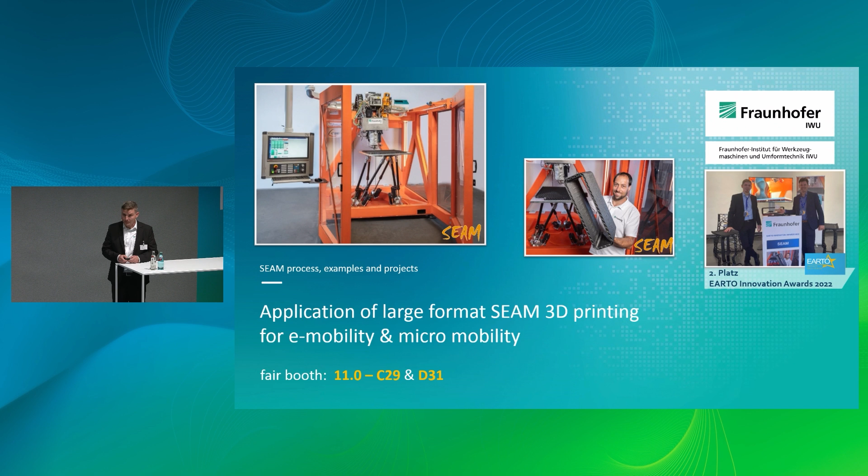First of all, the question is, what do we do? We are experts in, let's say, substitution. Our core business is to substitute conventional processes and materials with our innovative processes and materials.

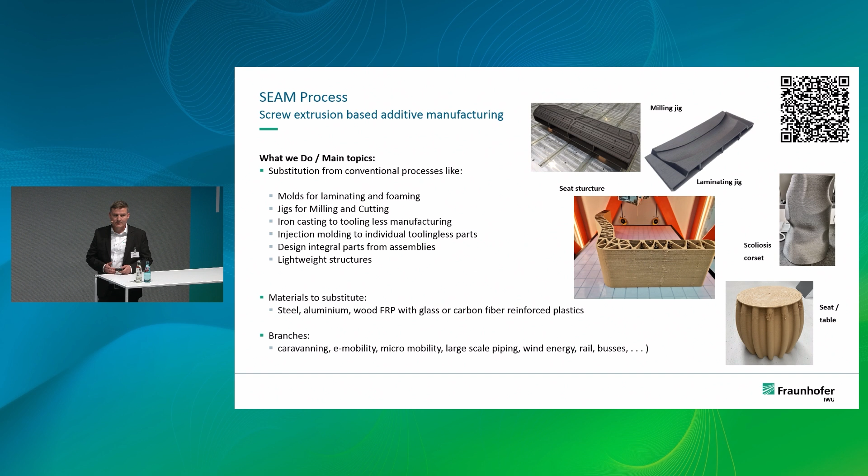After knowing what we do, the question is how we do it. We have different engines in our research department. We apply our SEAM extrusion head with different linear kinematics and also with robot arms, which makes it possible to have very big velocities for printing, and gives the advantage of getting very different geometries like organic or bionic shapes, or lightweight structures.

A fourth engine is in process at the moment. It will be a big 3-axis engine with a building room of 2 meters by 1.5 meters by 0.7 meters high, to get really big structures.

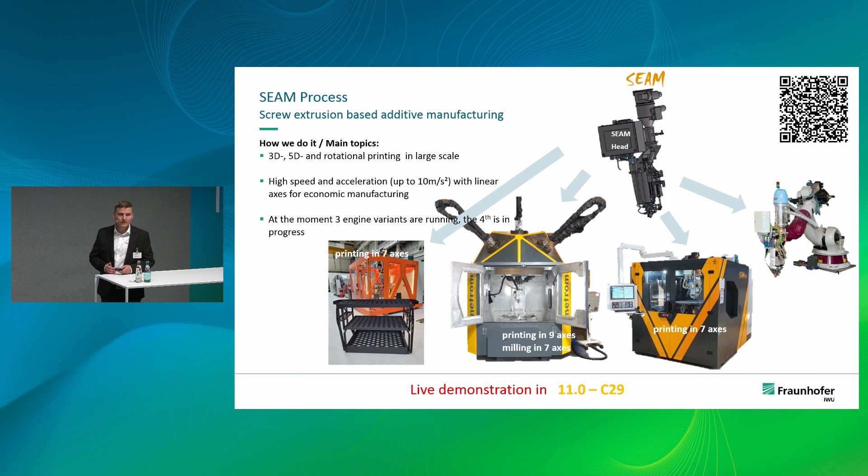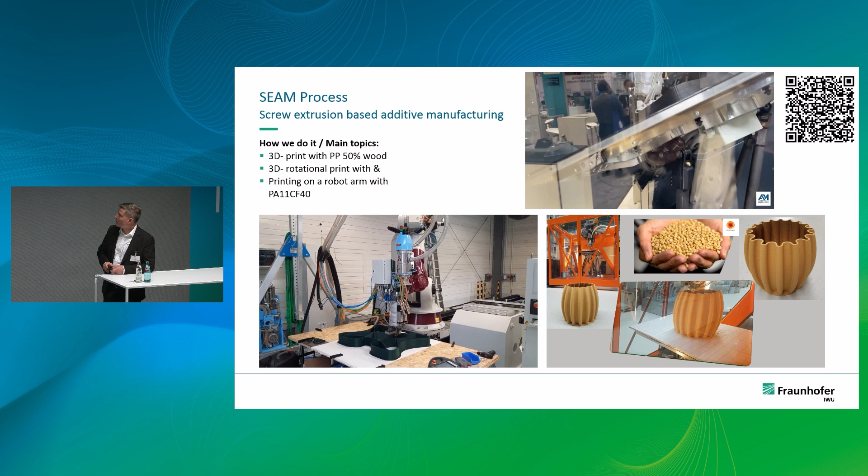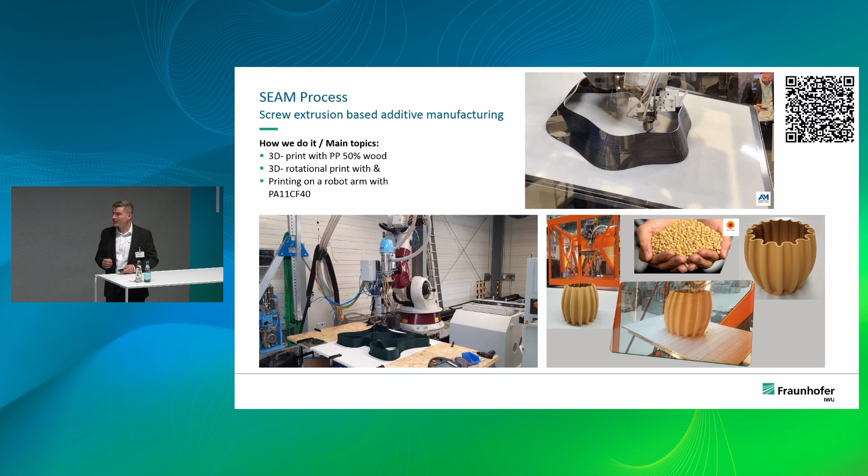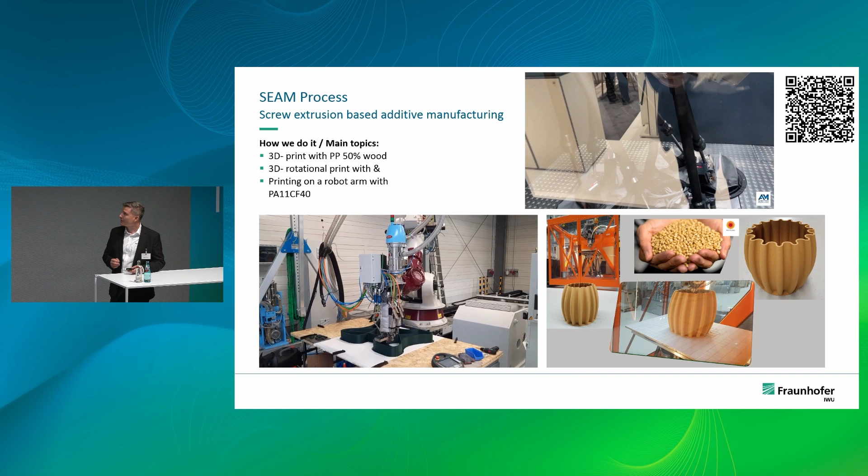On the lower left side, you can see the SEAM head on a robot arm. What's special about that is you can see the different velocities and the stopping in between, while still maintaining the same mass flow at all times. That's a special patent of our department—to have the same line width at all times while printing.

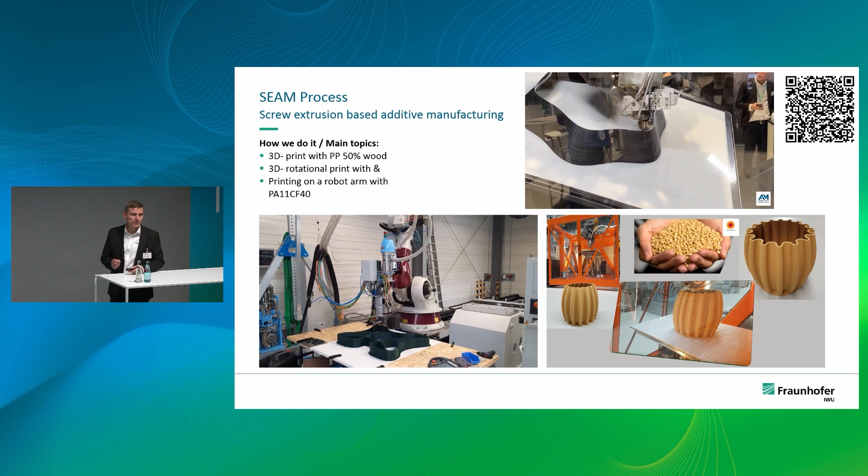What we also had is another approach for printing—a kind of rotational printing. On the left-hand side, you can see a part which is made to stand against high pressure, in this case 10 bar, and there was no failure in 5,000 cycles. We can apply a special ply book, for example, so you have different shells with different line orientations, and in the end the result is a really strong part.

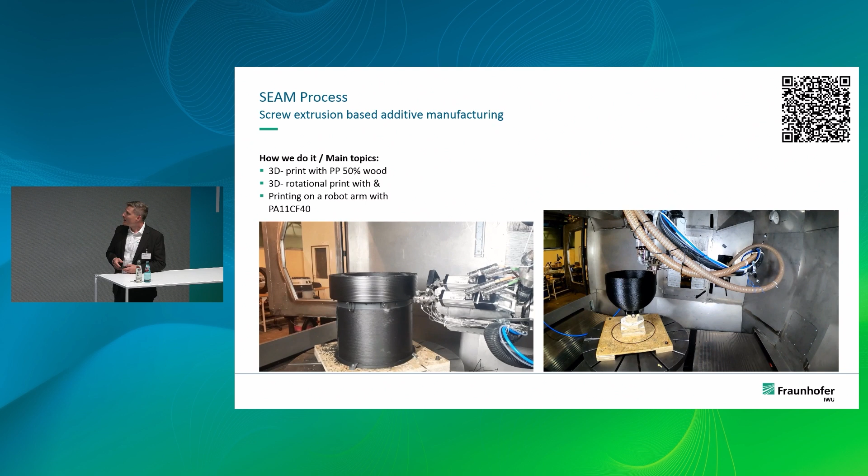On the right-hand side, you can see the inner core of a hydrogen tank. It's a liner part which is wound, and afterwards there is a winding process, resulting in a CFRP hydrogen tank. The nozzle is also guided 90 degrees to the surface to achieve a leak-proof body in the end. The final body is assembled from 5 parts.

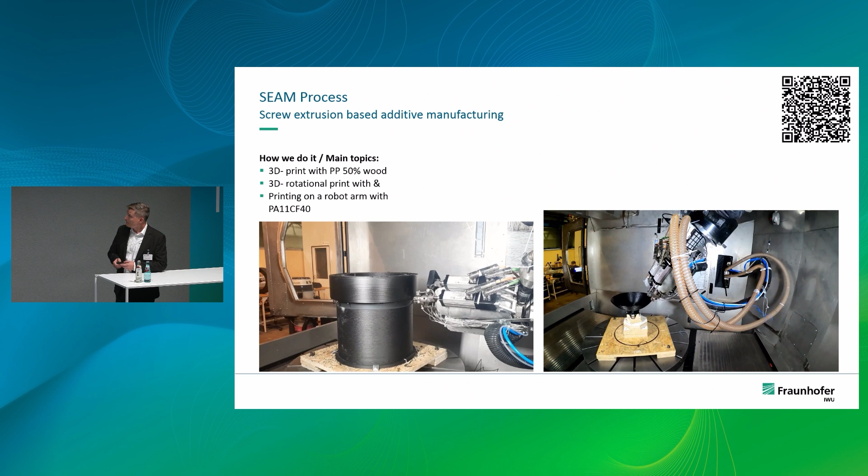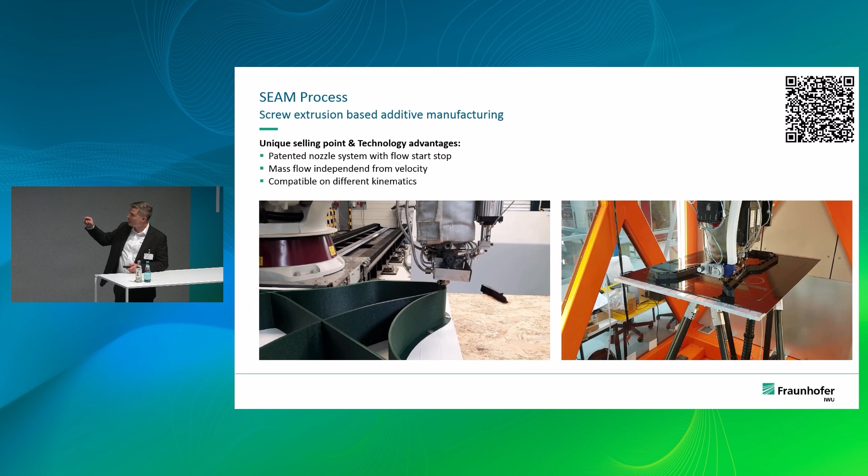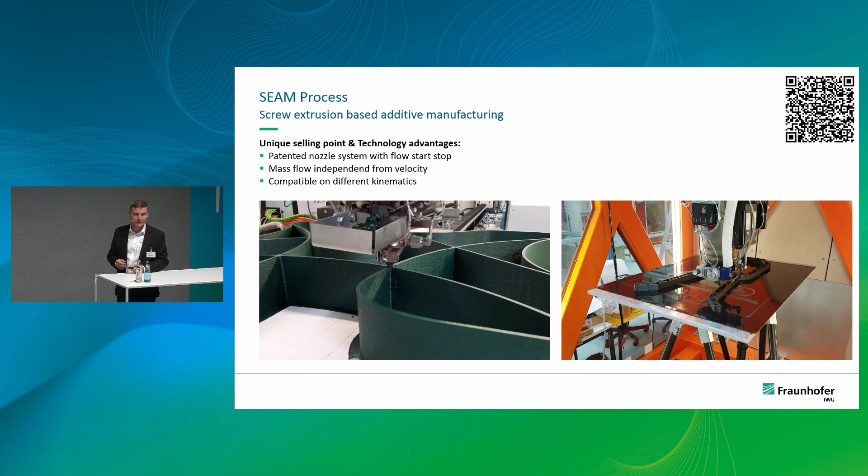What you can see there is also the patent from the Fraunhofer IWU. You can see that we also have a jump between different geometries—the nozzle closes up in between, and the mass flow stays the same throughout the whole part layer, independent of position and velocity. On the left-hand side, you can see the stub and the angle. That's, let's say, our process core field.

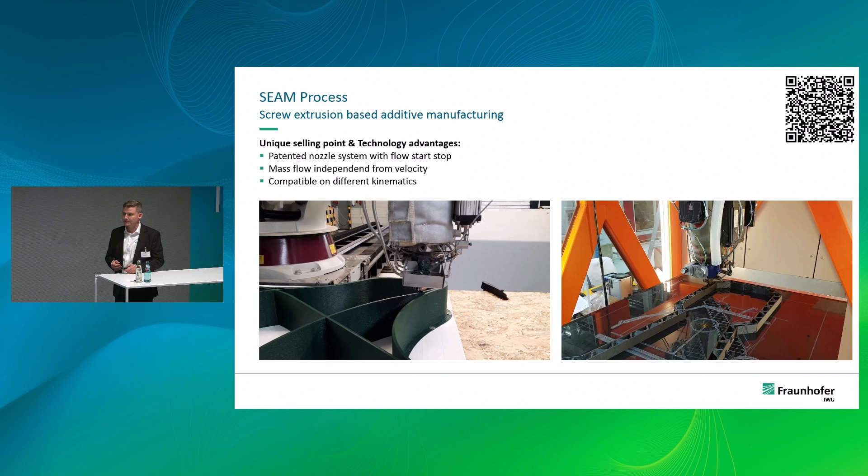What we have as an advantage, based on that technology, is that we are able to print at different angles, not only 90 degrees but also 45 degrees. In this case, it's possible to print closed bodies, not only open ones, without any support structure. That's very important for us, because we always want the most efficient material usage.

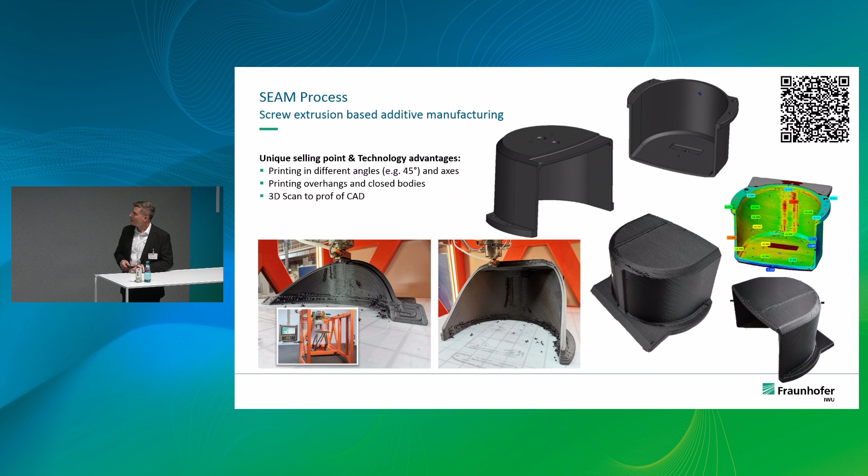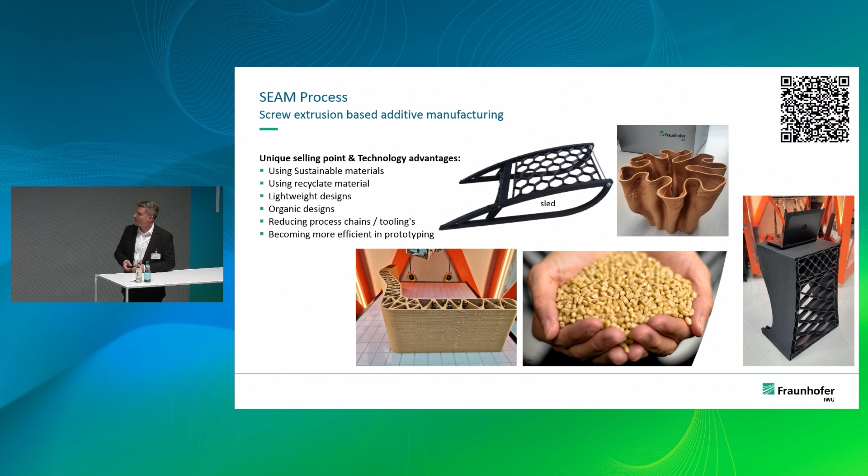Another advantage, as I mentioned before, is the degree of freedom in design. You can print different organic and lightweight structures. On the right-hand side is a machining table, and on the left-hand side is the core element of a caravanning seat. The approach there was to have a lightweight and ecological core in that seat development, using the same material with 50% wood and 50% PP.

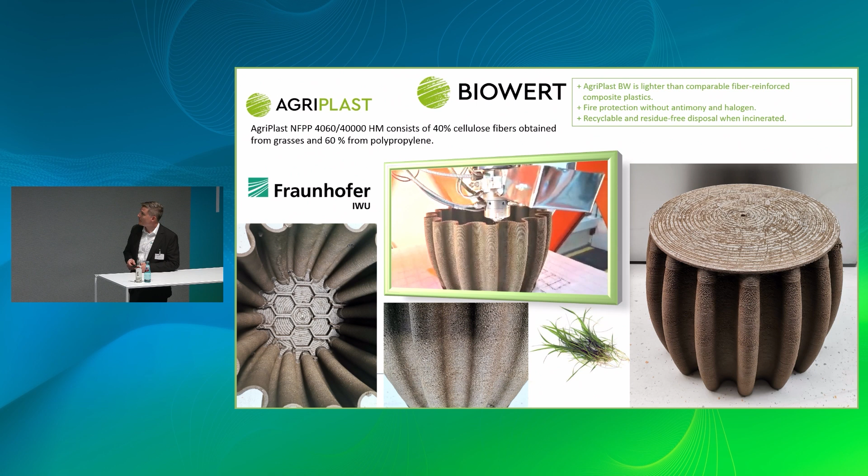Another material we used in a foreign project is based on grass—a kind of cellulose fiber mixed with 40% fibers and 60% PP. It's also with the same approach to reduce oil-based plastics in this project. What you can see on our booth D31 is our recycling cycle.

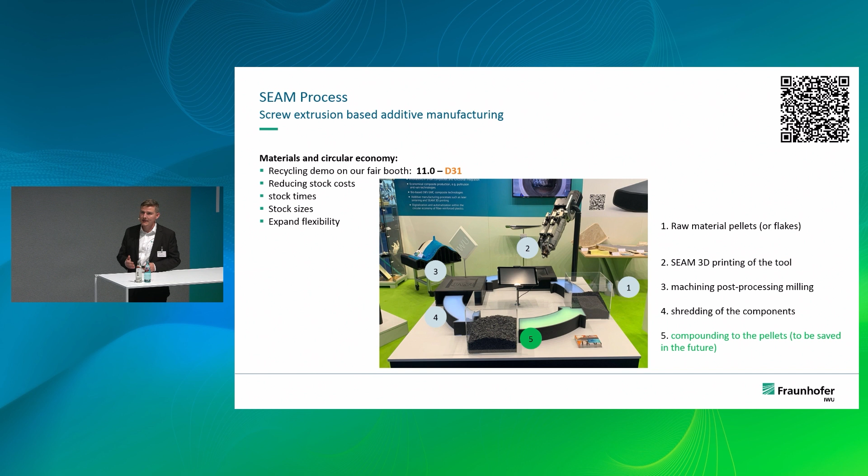The special point is that we use typical granulate like in injection molding, so that's very normal. Afterwards, as mentioned before, prototyping jigs like laminating jigs could be shredded afterwards, giving you a kind of flakes. The way is to use not only the original granulate, but also the flakes from the shredding itself, so we have a very small cycle.

That's another material example. You can see that the CO2 equivalent of PA11 is, based on mass, 8.4 times fewer than an aluminium alloy. So when you print with this material, you have a green part.

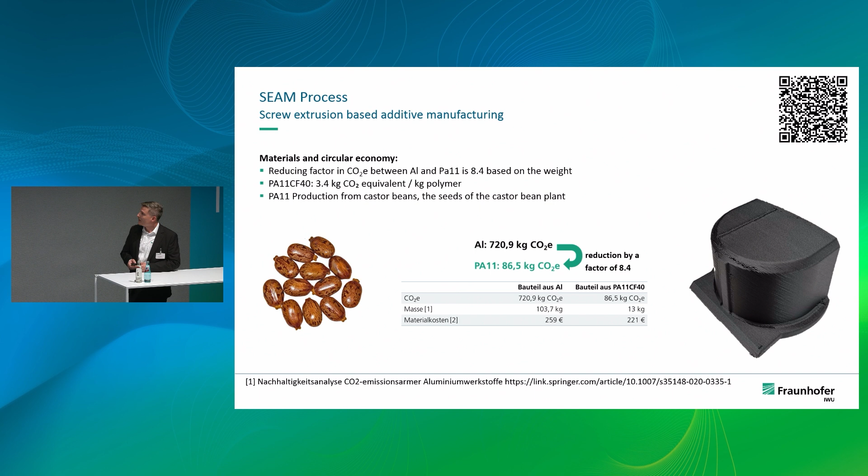It depends on the printing quality and how well the parameters are steered before the print starts. On the upper side is a laser scan, and we also work with a thermographic scan to analyze the hotspots, or in the laser scan case, to analyze the line height and width.

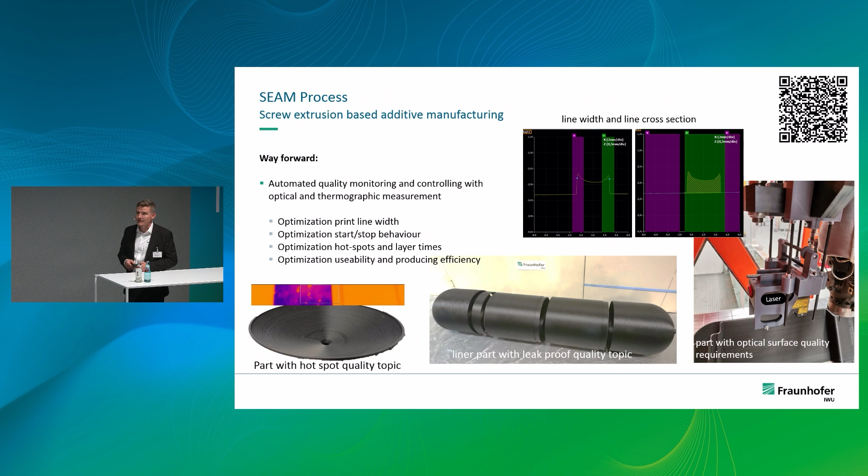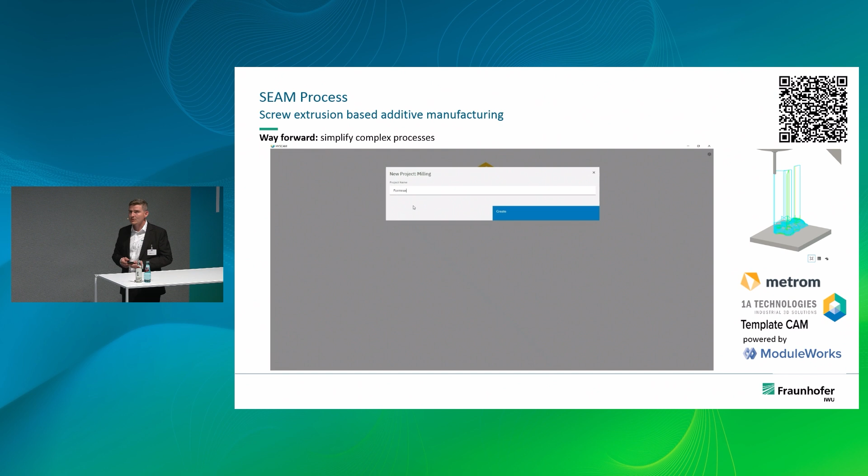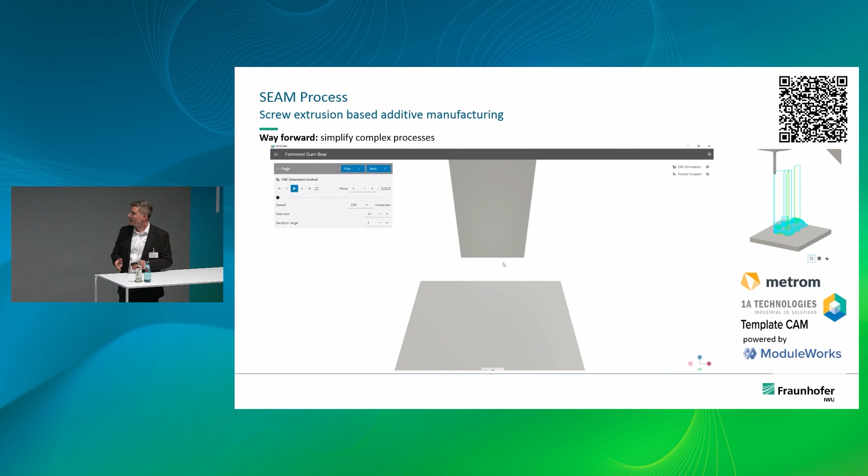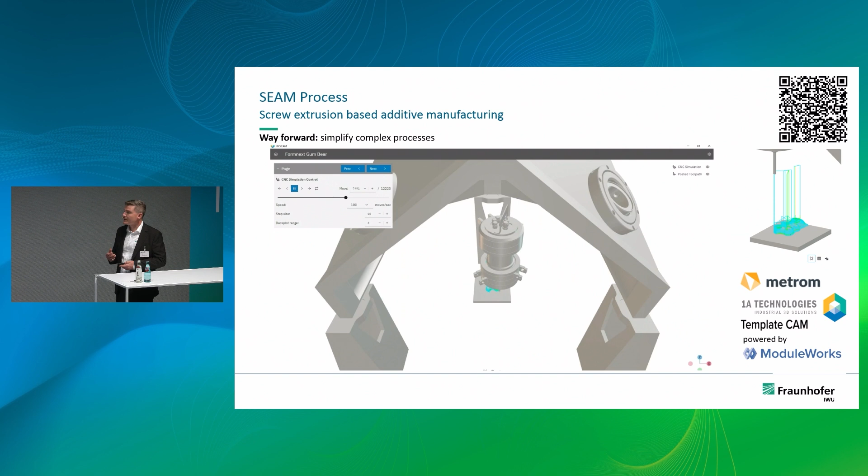What we also do is a topic to get the printing process into industry. As you may know, the large-scale 3D printing process can be really complex, and it's very important to reduce the expert level required for staff in front of the machine. So we work together with companies on software tools which are branded and fixed on our engines, very special, so you can do the CAM job very easily. In this example it's a milling process, but we're working to integrate our printing process in the same way.

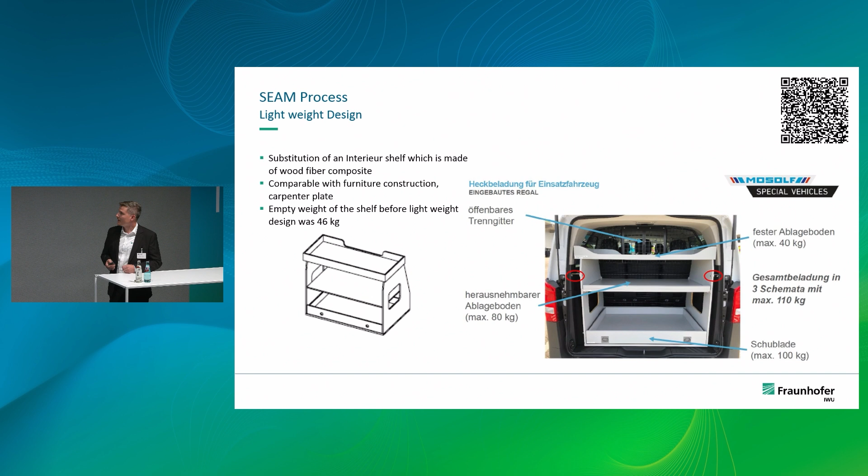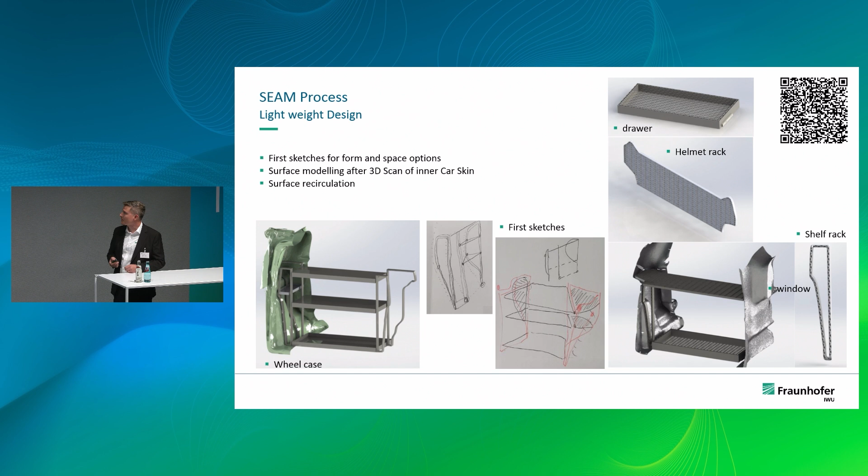Now I'll speak briefly about two of our projects. In this case, we did a substitution for a kind of furniture shelf for a police car. The approach was to reach a good lightweight degree, because newer electrical cars have higher weight due to the battery, so there is a seek for weight potential in the car. We got a scan of the inner car, a point cloud, and designed afterwards the new shelf parts and geometries. For that, we designed a special lightweight design with spline filling in the ladders, in the racks, and in the bottoms, plus a special fixture design to get it together easily without any big assembling movements.

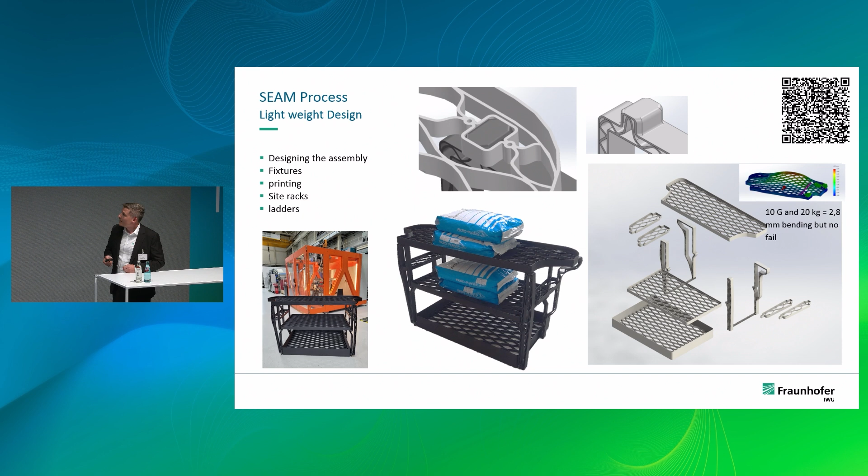The requirement was that it holds 10G, like a crash, with 20 kilograms on the highest bottom. The calculation said it was okay, and afterwards we did a real test with some weight. One package of this granulate is 30 kilograms, and it was a static test, but the dynamic test comes in the future. That's the final picture of the shelf—it was a great project.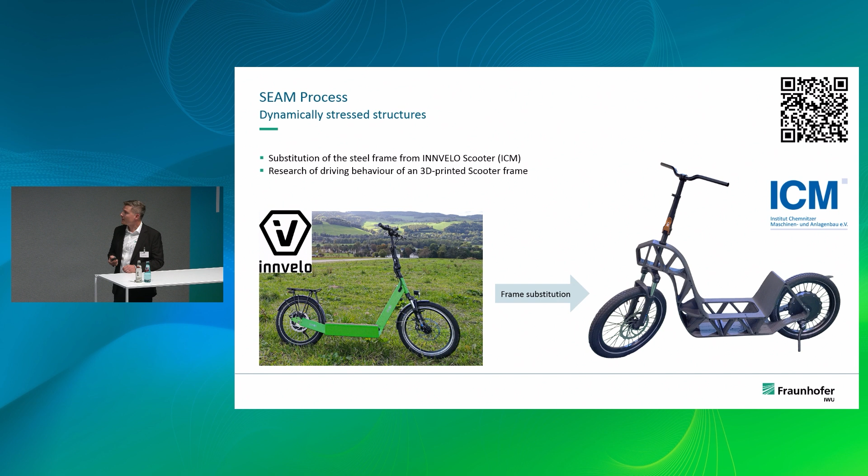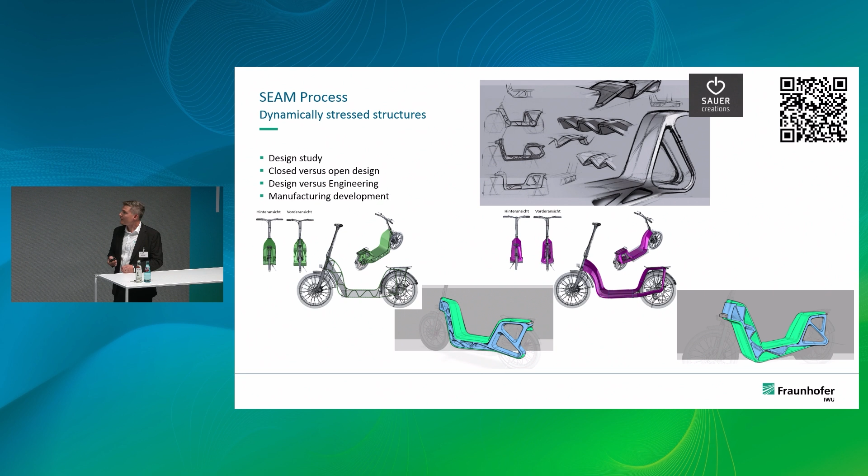The second one is our lightweight cargo scooter substitution. The original scooter from our partner ICM is the left one, the green welded assembly frame. We did a certain lightweight design and first did a design study comparing a closed and an open design, and decided the open design goes more aligned with lightweight goals. Afterwards we did a design which integrates the handlebar bearing and the back wheel bearing. The back wheel bearing is a kind of Y-sheet to guide the forces very well through the frame.

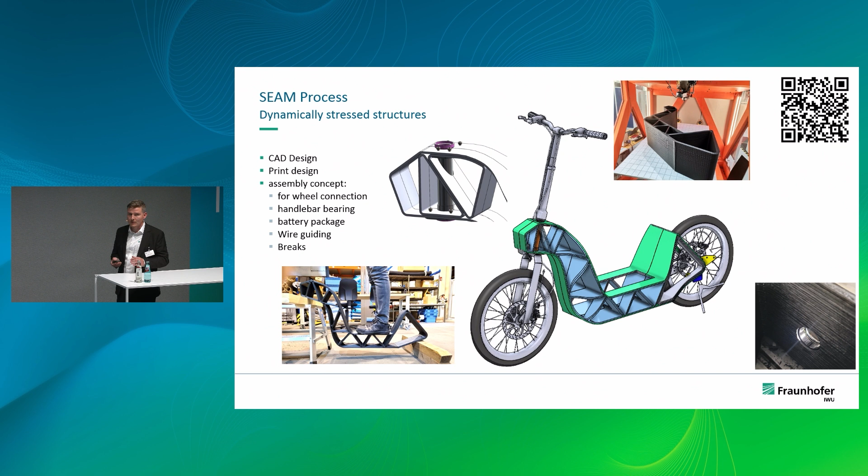We printed it and milled it for the first time. The first approach was to get it from two parts together, but the very first time we printed it all in one, milled it afterwards, and assembled it—that is the actual status. You can see it on our booth, C31.

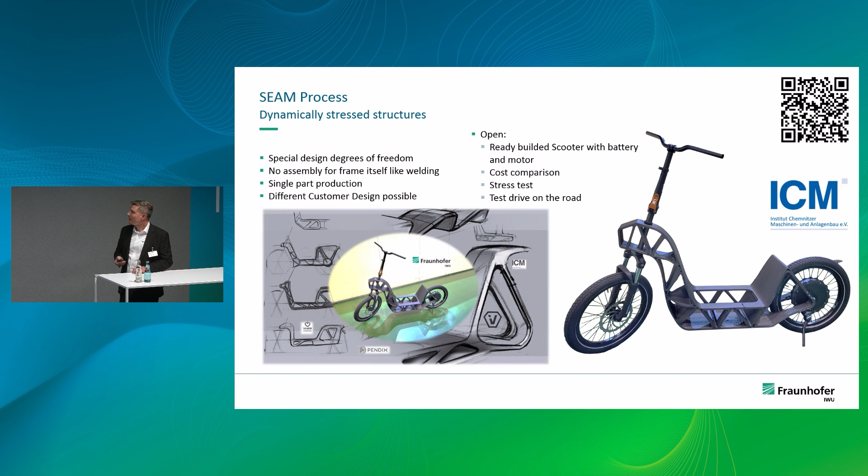Next steps are getting the assembly ready and having tests and calculation comparisons. With this example, I will finish the presentation and am open for questions.

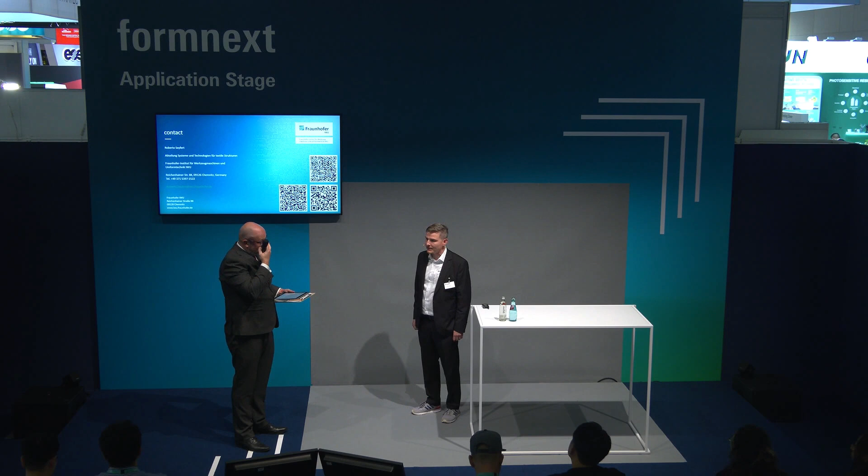Question: is the process itself, the SEAM process, to be commercialized and released commercially, or just for your own research—what's the ultimate goal? Answer: I think it's a little bit of everything. It's a big part research, but we also do industrialization with that. We had one engine used by a big textile manufacturer, where we applied not fiber reinforced thermoplastic, but applied elastomer and TPU onto textile—a kind of killer application, let's say. That is our first big industrialization. Last year we discussed the ramp-up for this described rotational print solution. The software solution I presented is really important for that case too, because you need a very efficient process to get a good business case—a very wide range of potential applications in the future. Thank you very much.